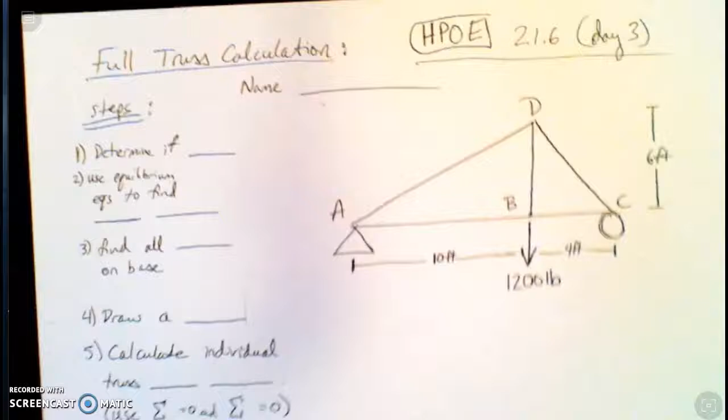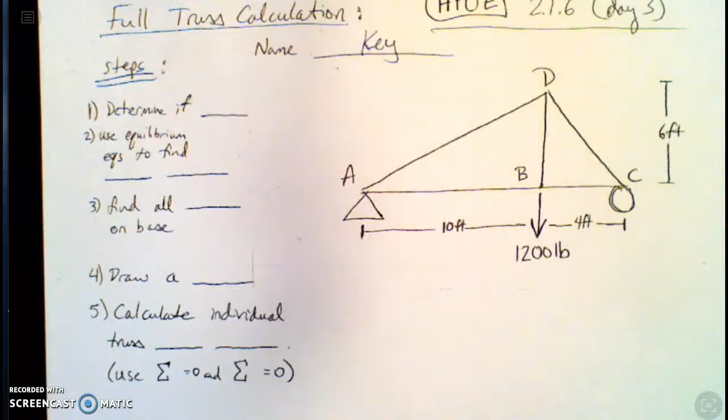All right, so this is your first full truss calculation. Follow along as we go. This is a pretty easy truss, but it's harder than the one you're going to do on your own tomorrow. So I want to go over this, and this is like the process you use on every problem. I said it before that every truss is different, but our process can kind of be the same.

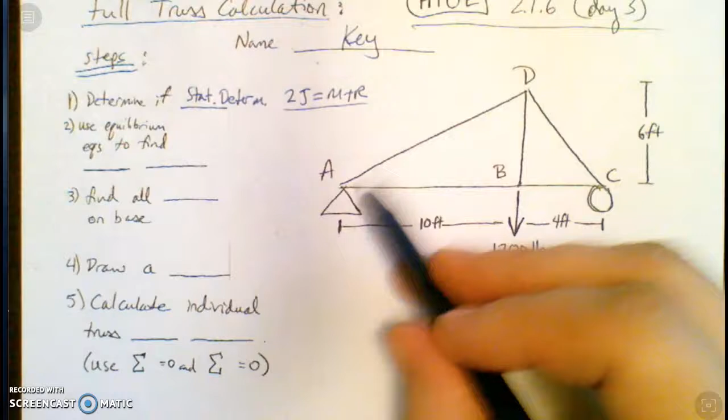Like step one, you should always determine if your bridge is statically determinate, which means does 2 times j equal m plus r. Okay, that should be your first step every time, because if that's not true, you stop the problem. So let's go ahead and do that right now. I want to check on this problem. I have 1, 2, 3, 4 joints. Okay, so 2 times 4.

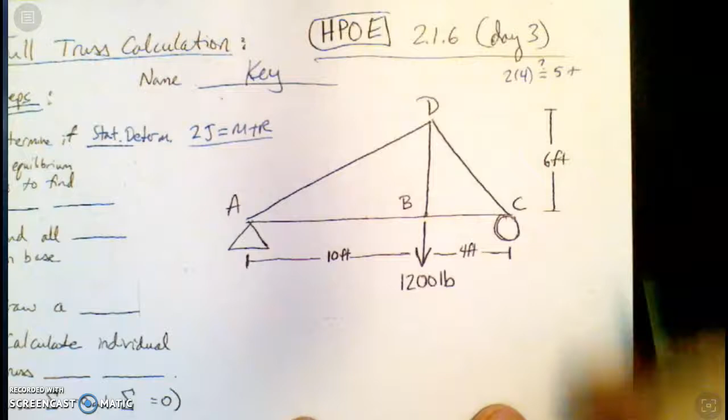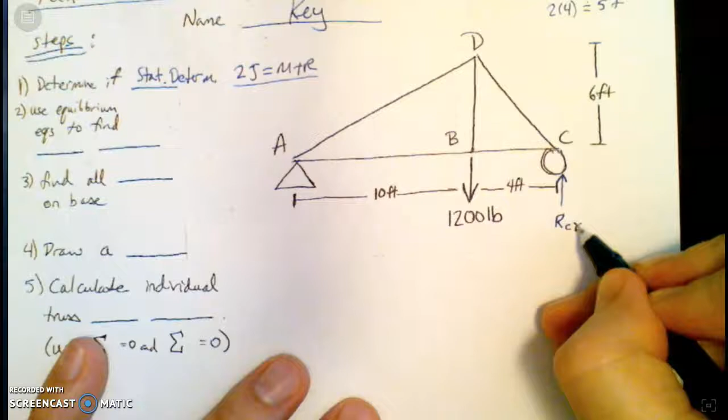Does it equal, I count the beams, 1, 2, 3, 4, 5, plus my reaction forces, and I might as well draw these in as I go. This is a roller, so there's a reaction force on joint C in the y direction. RCY. I've seen RCY before, he's our buddy. Okay, and over here, good old Rax and Ray are going to show up because this pin joint will be holding it up, so R, A, Y, and A will have a horizontal on it too because it's pinned in, so the bridge doesn't roll away. So it's Rax and Ray. So I have 3 reaction forces, and yes, 2 times 4 does equal 5 plus 3. So I'm doing the problem.

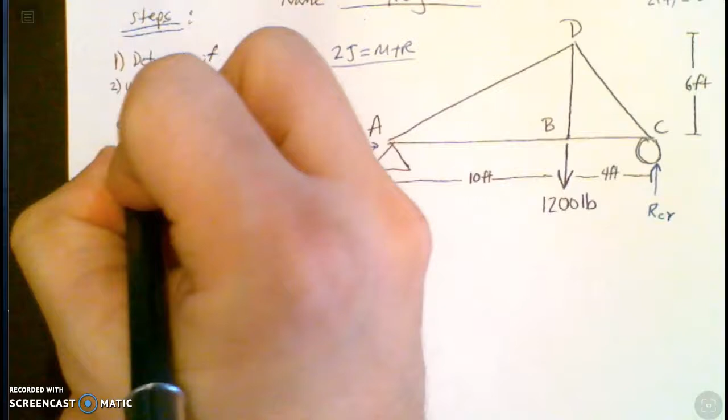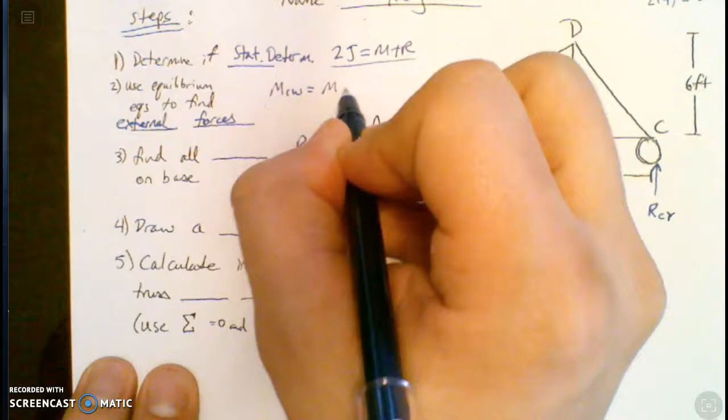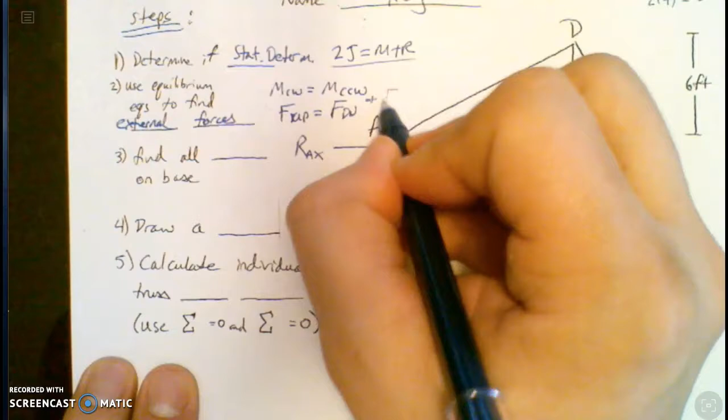Now, use equilibrium equations to find the external forces. This is basically what we've been doing in our practice so far on worksheet 1 and worksheet 2 at the beginning of worksheet 2. That's where we're finding the moments clockwise must equal the moments counterclockwise. And then your forces up must equal your forces down. And your forces left must equal forces right. So it's basically all the external things we did before. So let's do that. Let's go ahead and try that out.

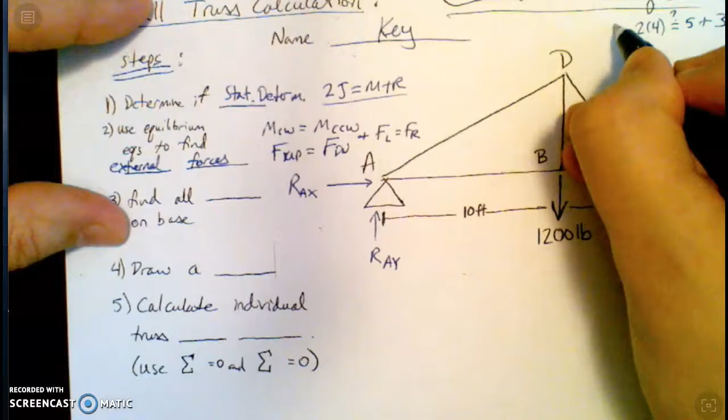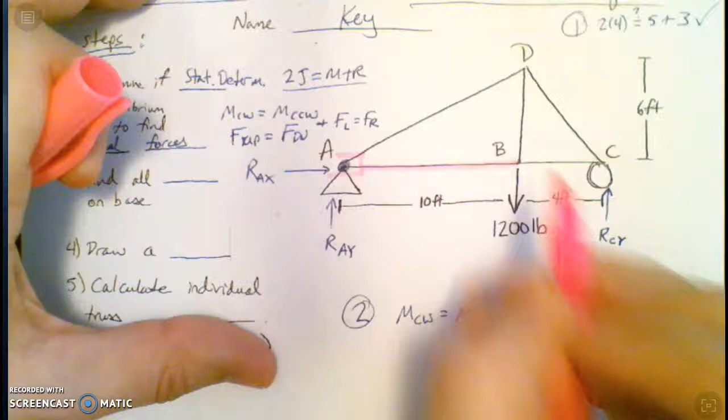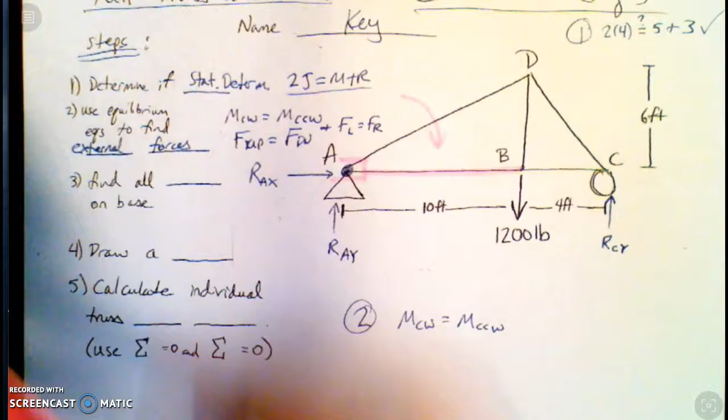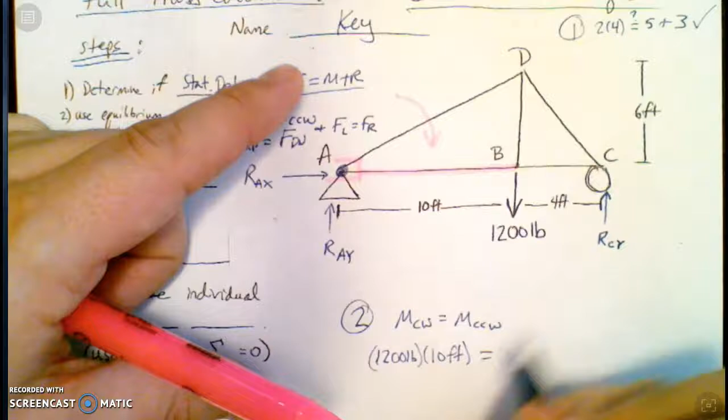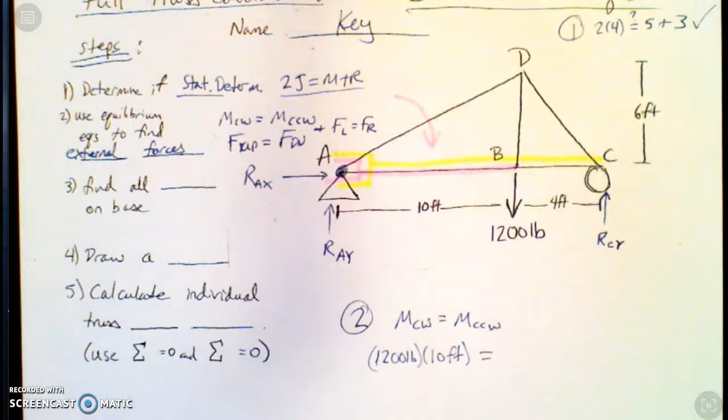So I'm going to go ahead and write that's a 1,200 pound force times its horizontal distance because it's a vertical push. So its distance is 10 feet. And that has to equal the counterclockwise rotation. So here, I'll use yellow. If I imagine this force pushing up, I got a wrench that goes like this all the way here. Okay, and that is trying to rotate my bridge up into the air. Okay, so I got one force that's trying to crank the bridge into the ground, the other one going up in the air, and that is RCY, I don't know it yet, times its distance. Now don't fall into the trap and write 4, because you want its distance to the pivot point. So it's actually going to be 10 plus 4, which is 14 feet.

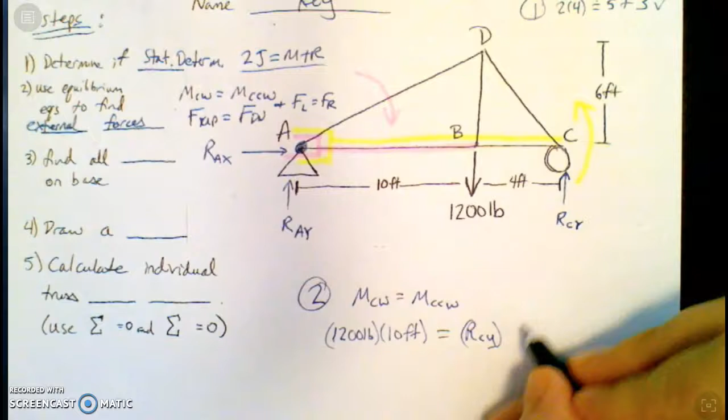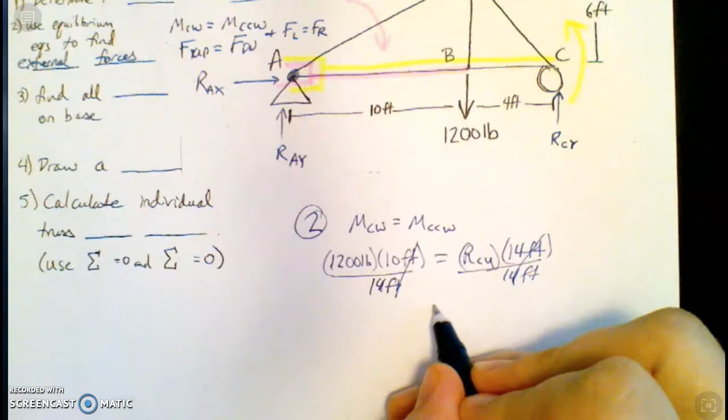Then we can do a little division, and you should start to feel comfortable with these type of problems with the wrenches and stuff. The feet cancel with feet, so I'll be left with pounds. And this is where we're going to use these answers to take it one step further in a second. So 1,200 times 10 divided by 14 feet. And we get 857.14.

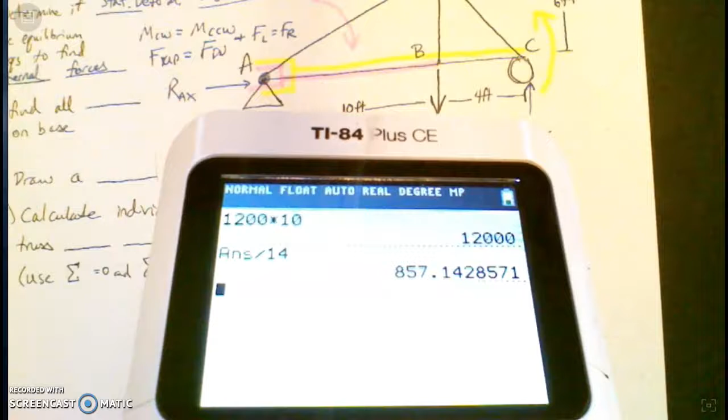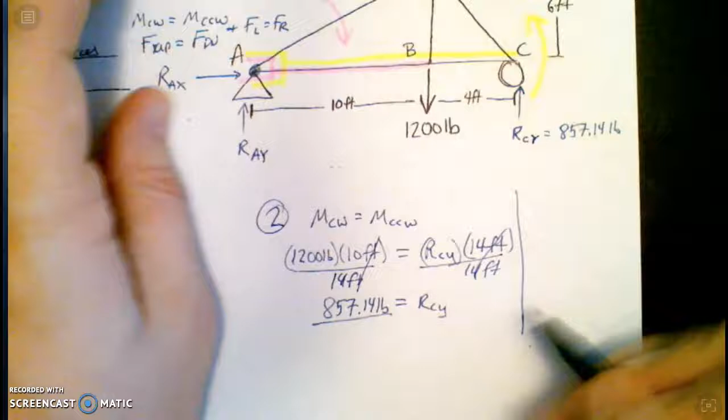857.14 pounds. That I'm going to write up here. Okay, that's helpful. Now, my ups have to equal my downs, and my lefts have to equal my rights. So it's still in step 2, but I'm going to say force up must equal force down. All right, let's see how this works. I have 1 down, and I have 2 ups. So my 1,200 pounds, my force ups.

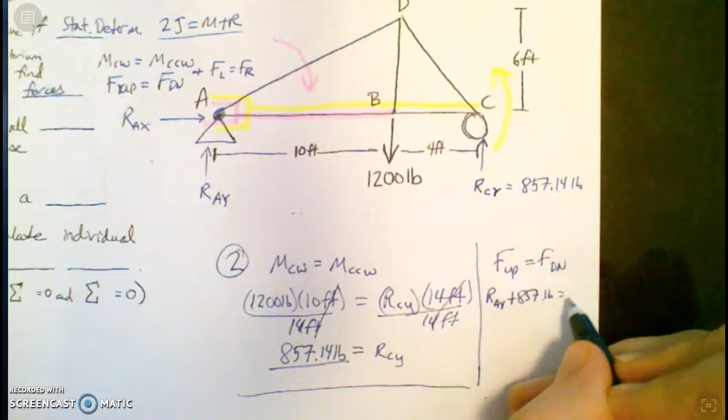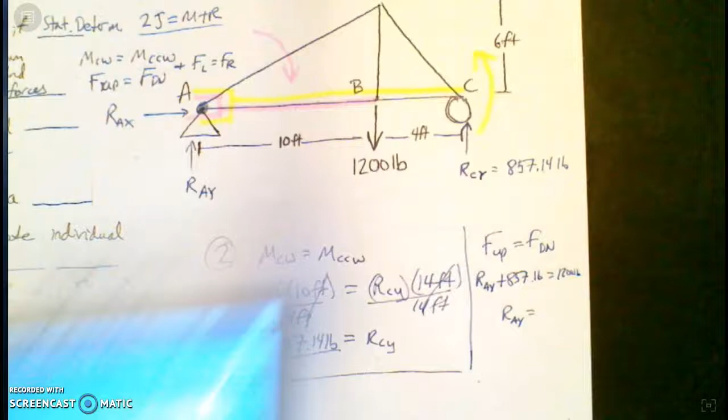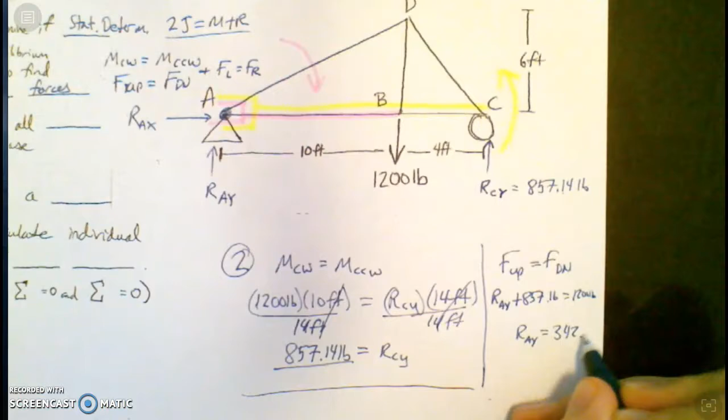So I have RAY and this 857 must equal my 1 down, 1,200 pounds. So I do a little subtraction, and RAY must equal 1,200 minus 857.16 pounds, and we get 342.84 pounds. 342.84 pounds. Awesome.

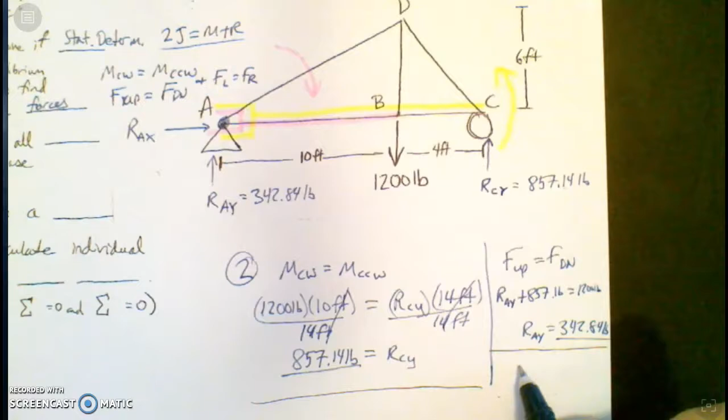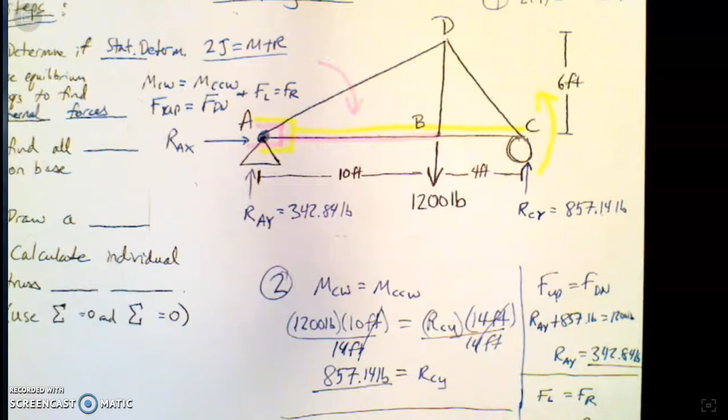Okay, and then my lefts have to equal my rights, which is really quick. So my force left has to equal my force right. I only see RAX as a right force. I don't see any other forces for left, so there are 0 pounds going left. So RAX is 0. I got all three reaction forces. Awesome. That wasn't even that bad.

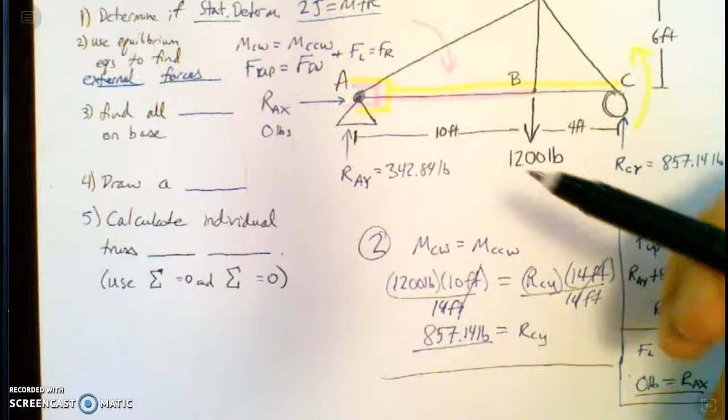Okay, you put those on the picture when you get them. So now I don't have any unknowns. Those are all my external forces. Now we're going to take it a step further, because you should already kind of know how to do that. We're going to take it a step further and find all the forces on the beams. This is big time, man. Big time. Okay, but before we do, I'm probably going to do step 3 and 4 in this video and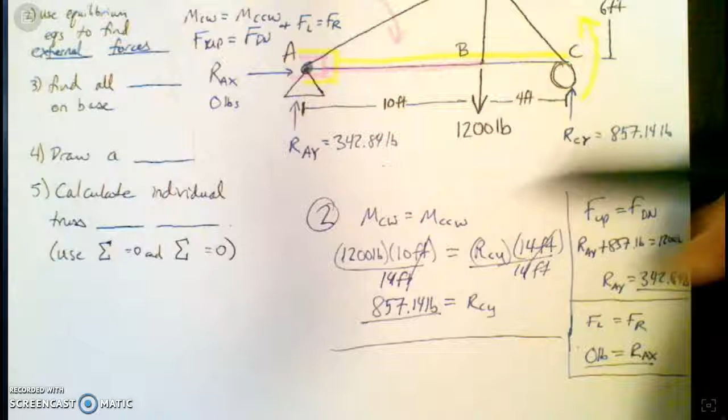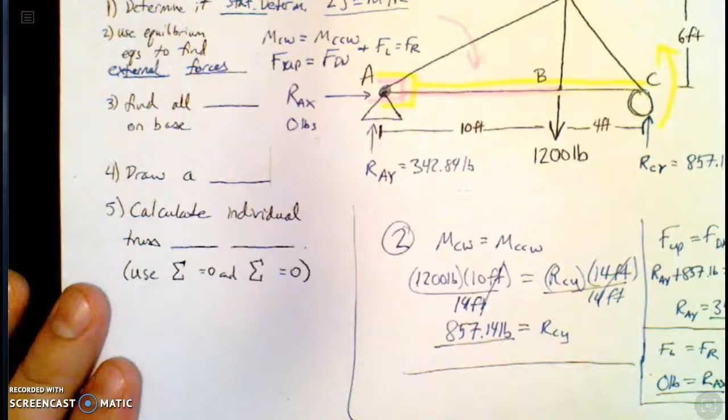then switch over, because step 5 is like where most of the work in these problems is. This is like, I think of this as like prep work. All the first 4 steps are just getting the problem ready. After that, then the real fun begins. Okay, so I like to keep my work organized, so there's step 2. Step 3 is find all the angles on the base. So I need to know this angle.

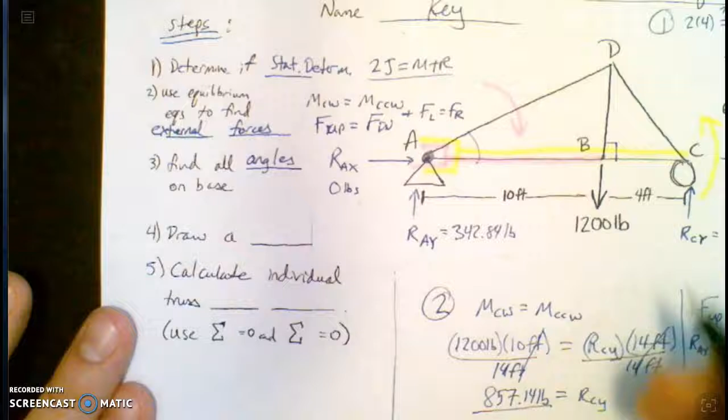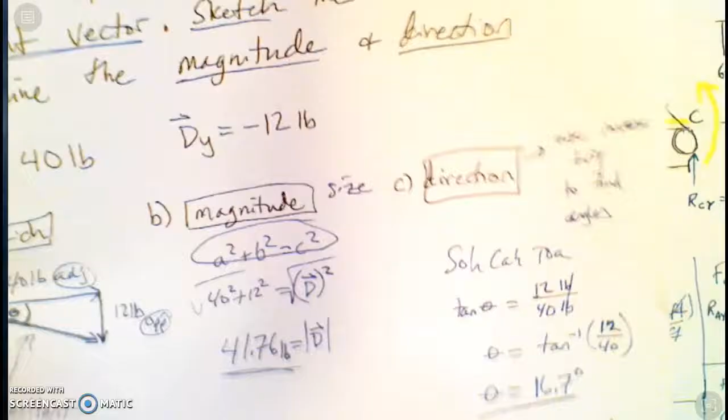I can assume 90 degrees on here. You're allowed to do that. If it looks like a 90, we'll assume it is. I need to find angle A, and I need to find angle C. Okay. Now, good old trig helps you do that. We just did a practice problem on our warm-up sheet, right? If you ever want to find an angle, it's basically the inverse tangent of y over x. That's going to be our shortcut.

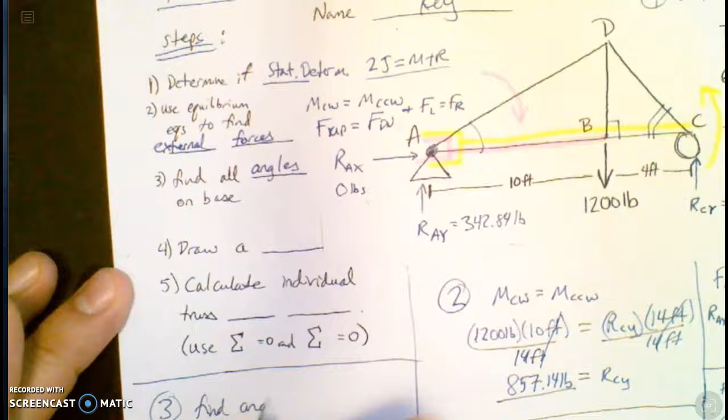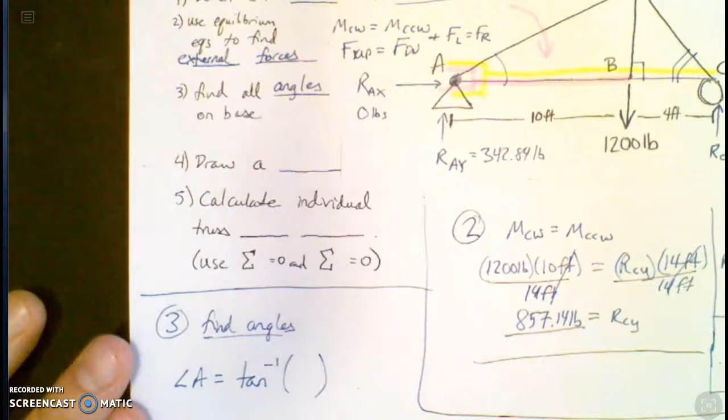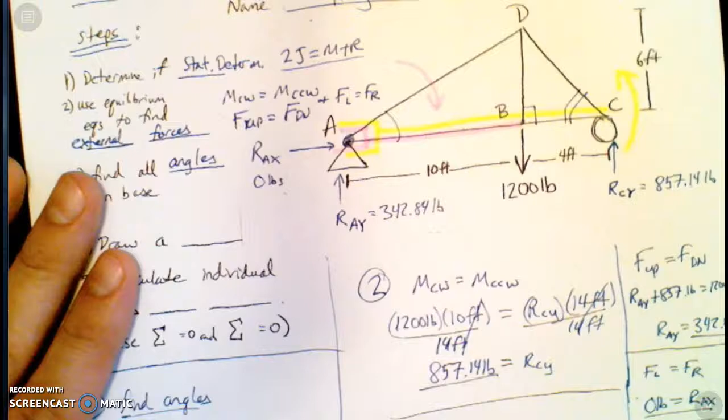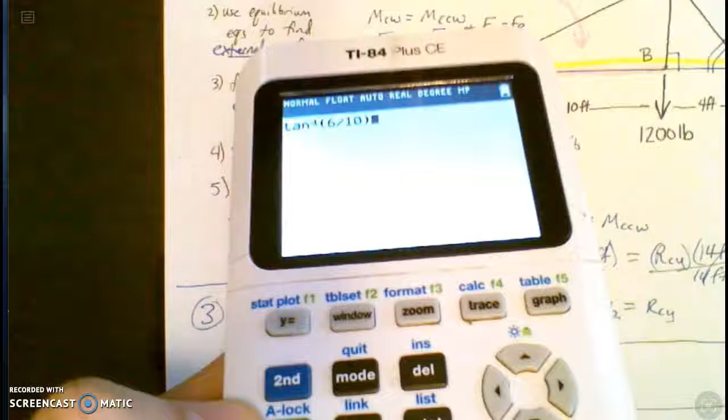So find the angles, right? So angle A is going to equal the inverse tangent of the y over the x for that triangle. So if you look at this triangle, look at the right triangle, see this guy, ABD. What is the y? It's this height, which is 6 feet, over the x, which is 10 feet. So I can just do inverse tangent of 6 feet over 10 feet. If my calculator is in degrees, I'll just do inverse tangent of 6 over 10, because the feet cancel. And we get 30.96. Let's call it 31.0, because it rounds to that.

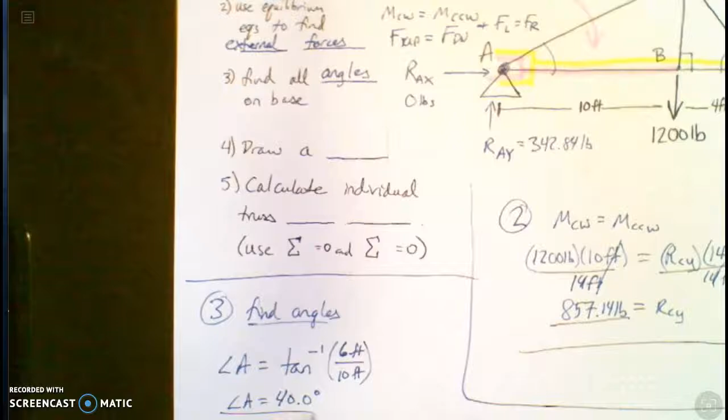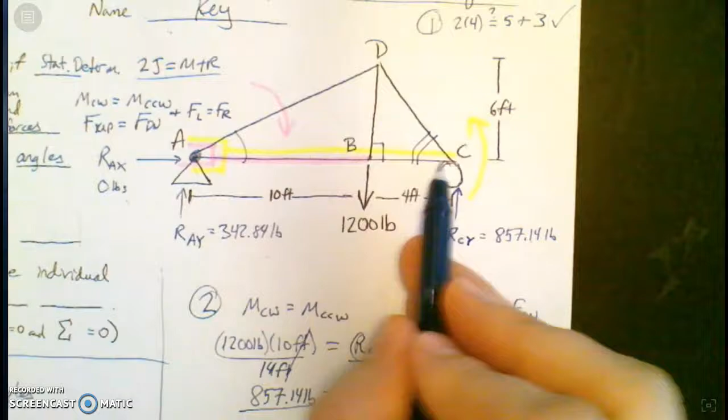40.0 degrees. I'm going to do the same thing for angle C. So I look at angle C, and I set up my equation. I'm going to say angle C is the inverse tangent of the y over the x. I would just write myself a reminder here. Y over x. So when I look at this angle, its height is still 6, but its base is 4. Okay, so it's going to be a different angle. So I have 6 feet over 4 feet. Okay, and the feet cancel again. So I just got to type that in my calculator. Inverse tangent of 6 over 4. And I get 56.3 degrees.

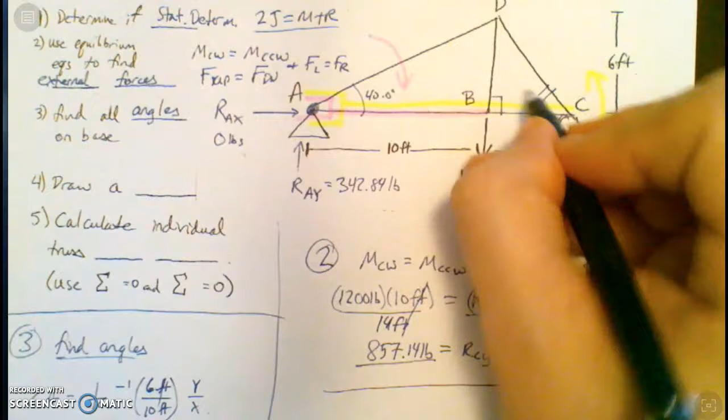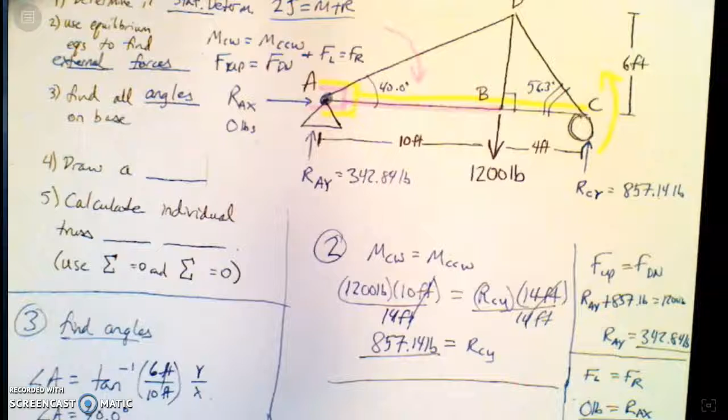Okay, awesome. So step 3 is done. Now I want to put those on my picture. I want to write 40.0, and I want to write 56.3 degrees. Those are the only angles we need. You never ever need the angles up top. You only need the angles formed with a base, which is kind of cool. It goes back to a geometry concept that we'll talk about later. Now, step 4 is draw a free body diagram.

Now, I did this while I was gone. We'll call it FBD in the future, so we don't have to write as many words. So this is step 4. Draw a free body diagram.

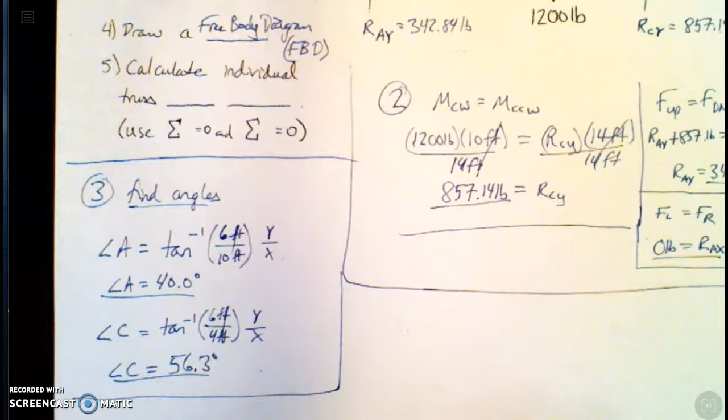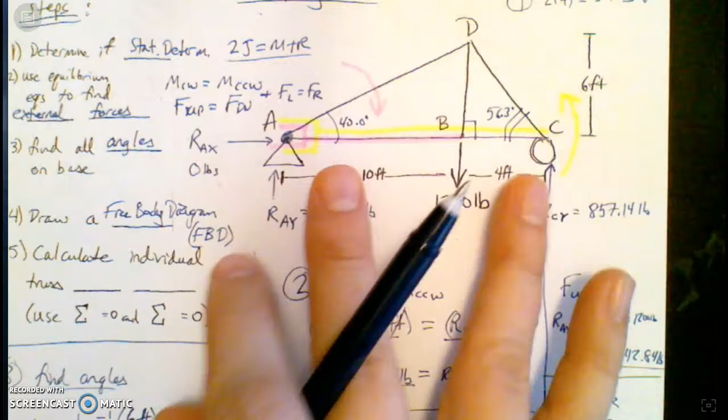Now, we did this with like a sled, and we did this with pushing a refrigerator up a hill and stuff like that. But the good thing about this is free body diagrams are so easy to draw if you do it in pencil. Because I just get to draw this bridge without the pin and the roller and the forces on them. And if I have an eraser, it's really easy. Okay, so let's redraw this bridge.

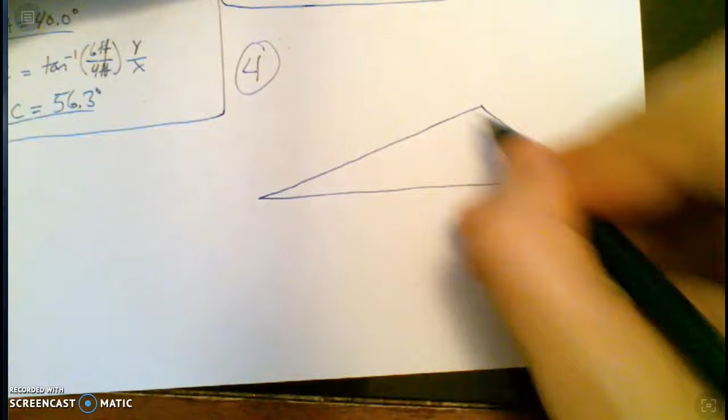Now my pen is erasable, so that's why I'm doing it in pen. So I'm going to try to redraw this bridge. The measurements don't matter anymore as much. And then you got this straight down thing here. Okay, so I'm just redrawing it. I'm going to label A, B, C, and D. Okay, so we label it, and then put your reaction forces on.

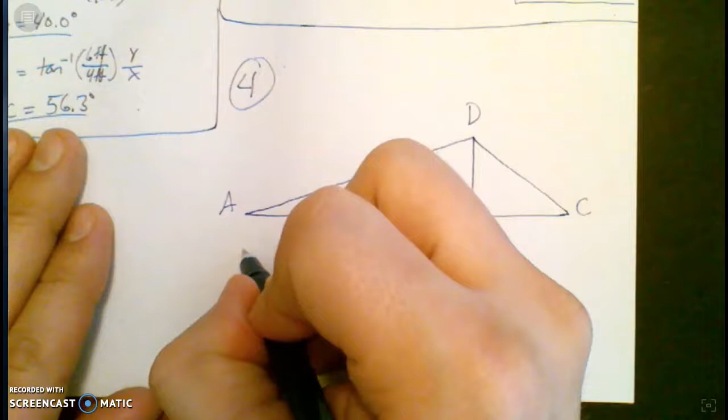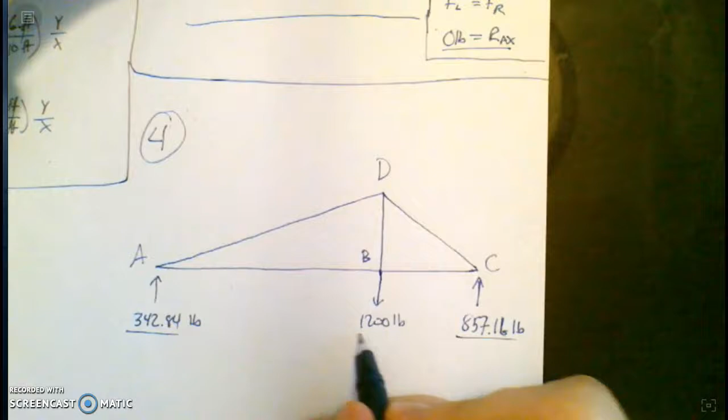So I got this force going up at 342.84. Okay, I got a force here of 857.16. Put pounds on there. Okay, and I don't have to write the 0 on there. It's kind of excessive. If you have 0 force, you don't really need to write it. And I have this 1,200 pound external force on there too. So those are the only forces happening on my bridge on the outside. The 0 I don't have to draw.

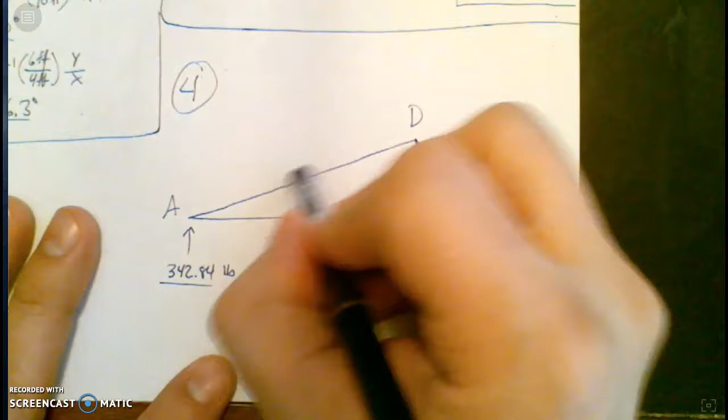So now, to make it a free body diagram, you just erase the middles of every one of these beams, because we're going to be looking at each joint on its own. So I'm erasing all the middles. This is why you do it in pencil. It really helps you focus on each joint at a time. This is called the method of joints, the method we use.

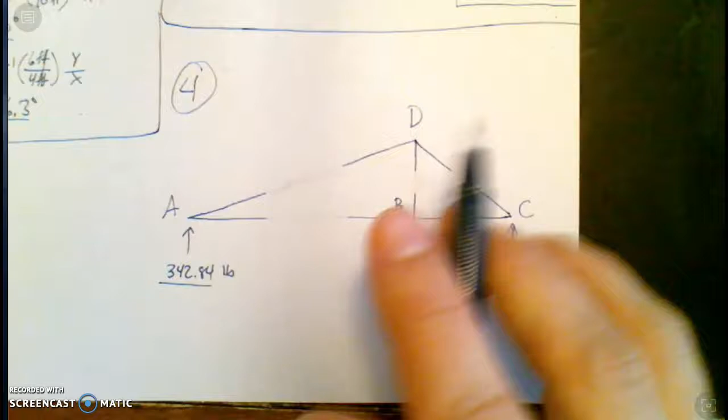Now, here's where good old common sense comes in, because all of these need arrows. But I hope you understand this, so pay close attention on the next minute or so. I actually know which way the force is on here. Is it going up or is it going down? And you know how I know? If this bridge is not moving and I have an up force, the only thing that can keep joint A, and remember, we get to ignore all other joints,

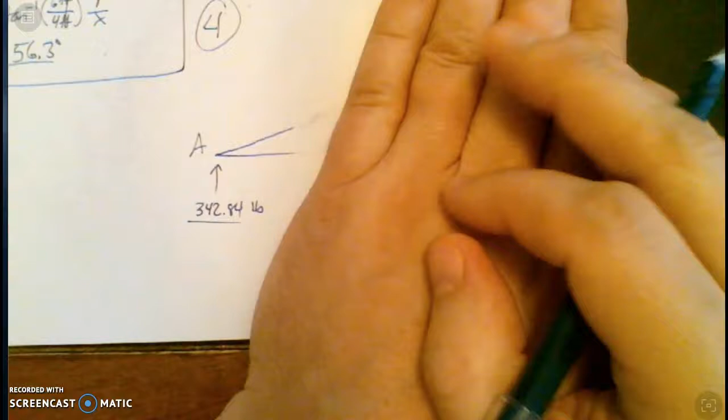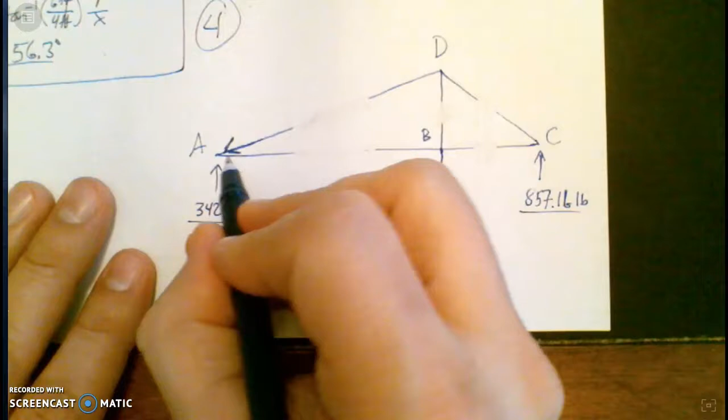The only thing that can keep joint A from floating into the air is if there's some sort of down force fighting that. Well, the only way to make a down force in this whole picture, see how that's left and right? The only way to make a down force is if that force is pushing down. Now I have a down and left force, so guess which way this force has to go? The only thing that can fight this left force and keep this joint A from floating off to the side must be a right force. So I'm going to draw a little right force.

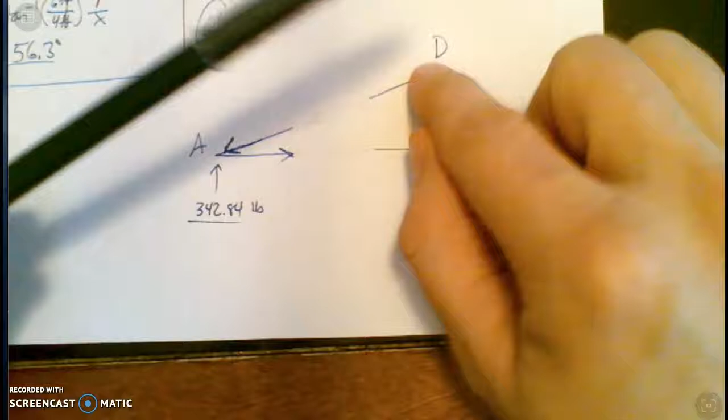Okay, and now here's a cool thing. In science class, you learn that every action has an equal and opposite reaction, right? Force. So if I'm pulling, imagine this is beam AD. If I pull to the left, down and to the left on it, what do I have to do with my right hand to keep my pen from moving? Okay, right now, if I don't do anything, it just pulls off. But our bridge isn't moving, right? So this down force has an equal and opposite up force. It's like it's already done for you.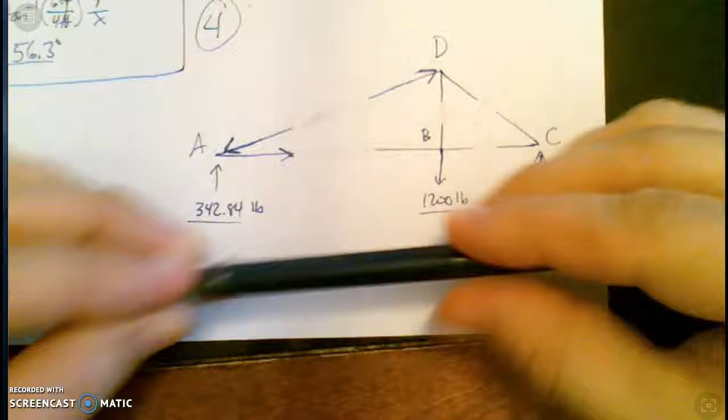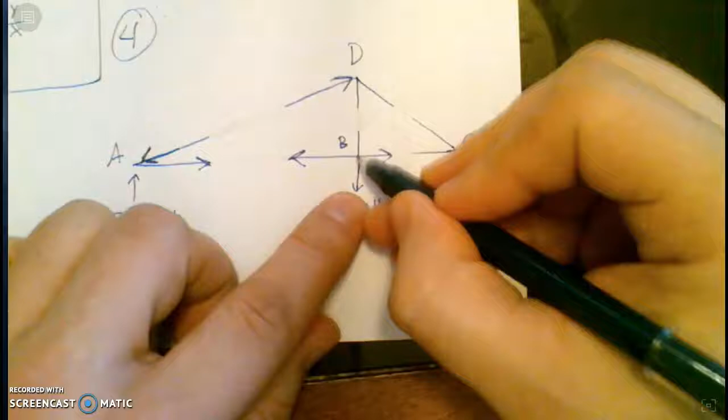And if I'm pushing, see this is pushing. If I'm pushing with my left hand, it would move. But my bridge isn't moving. So there must be a force that's fighting it over here, an equal and opposite force. And that's kind of cool, because now it's like a domino effect. Okay, think about it. Now on joint B, I ignore joint A for a second. If I have a left force, there must be a right force to fight it. If I have a down force, there must be an up force. So you're figuring out all these arrows without even trying very hard.

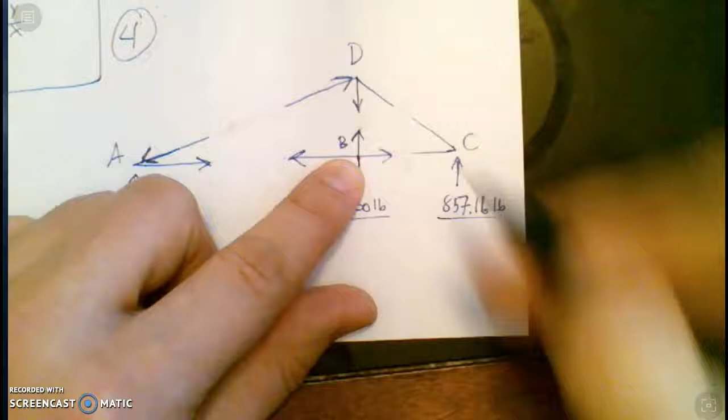Same deal here. Look at joint D. If there's an up force here, there must be a down force. On joint C, if there's an up, the only